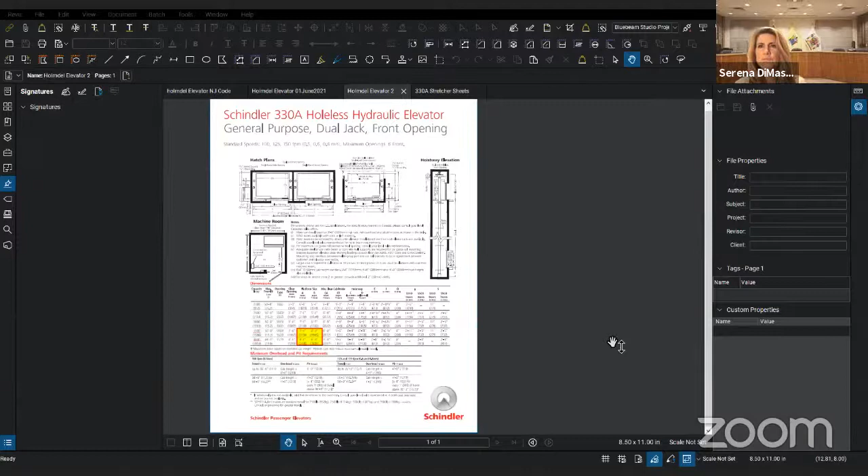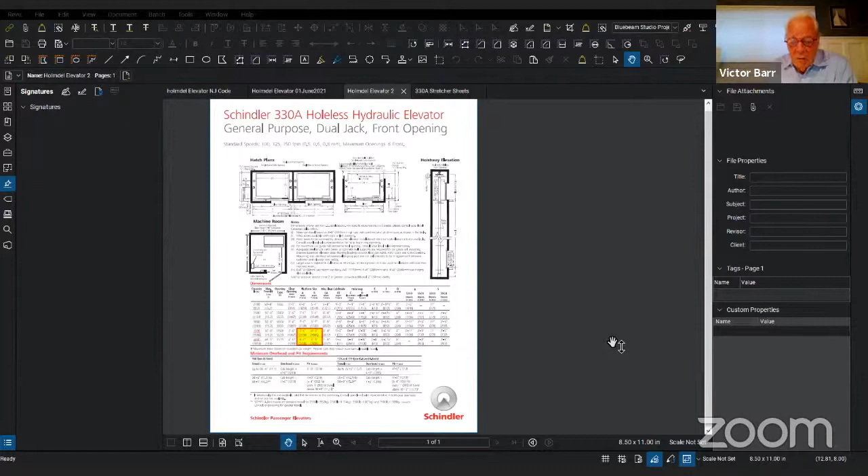The 2018 International Building Code, New Jersey edition, states that any building 4 stories or more must have at least one elevator that accommodates a 24 by 84 inch stretcher. Our original plan had what's called a 3,500-pound elevator with a platform size of 7 foot by 6'3". After hearing comments from the planning board asking if we could make this bigger for more breathing room, we decided to change to what's known as a 4,000-pound elevator.

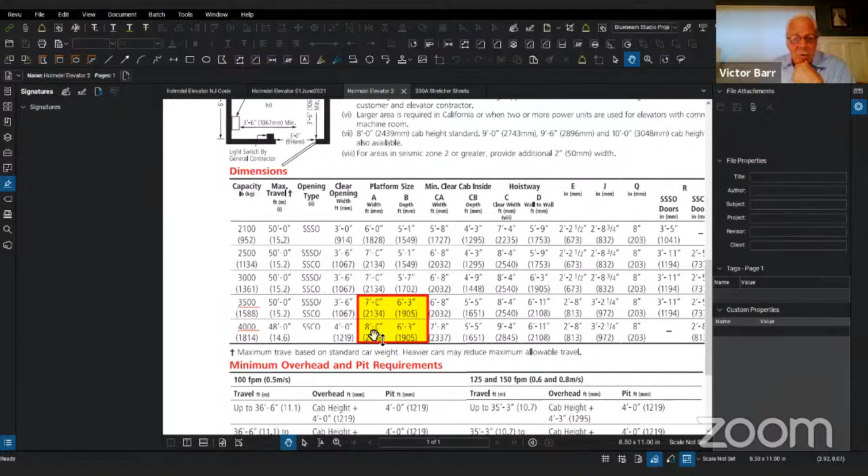This has a platform size of 8 foot by 6'3", which is 12 inches bigger than the original 3,500-pound elevator.

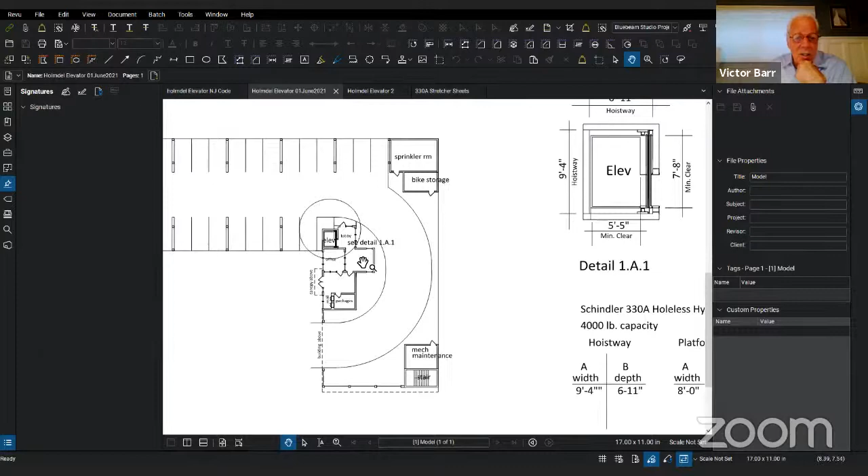On the plan, here on the first level is the new 4,000-pound elevator in the lobby area. And here it is on the upper floors, in the lobby area on floors 2, 3, and 4. That's the mechanical room that happens to be on the second floor.

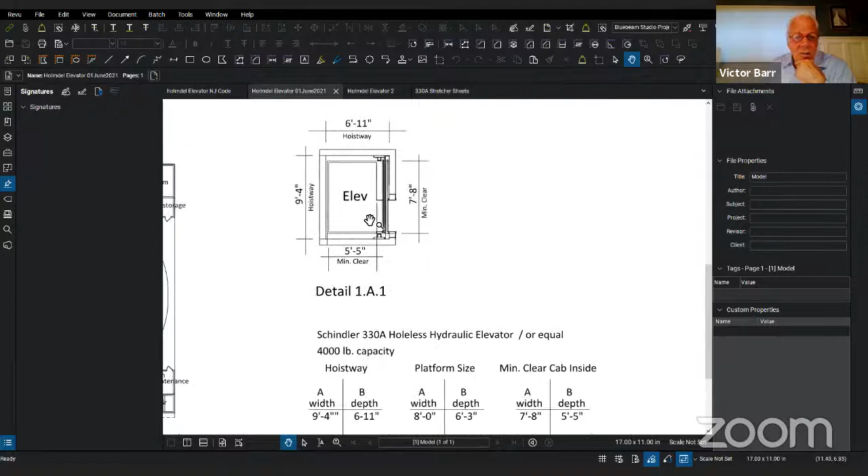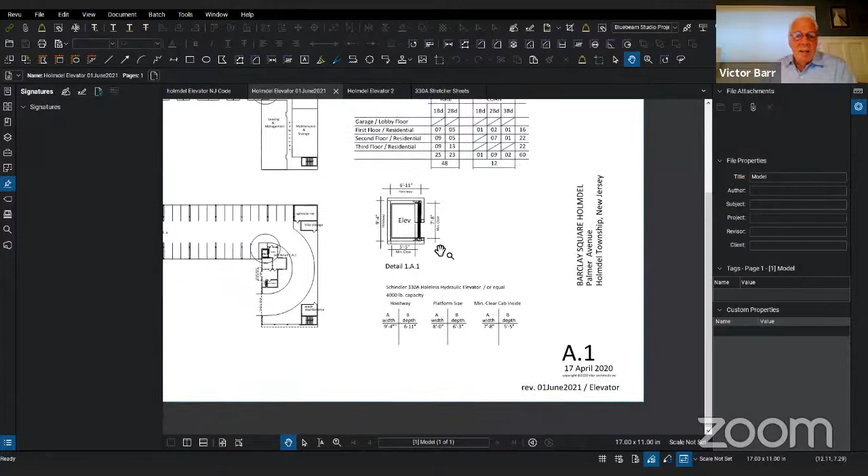From that previous plan, the hoistway is 9'4" by 6'11", which we have. The platform size, as I stated, is 8 foot by 6'3", and the minimum cab clearance is 7'8" by 5'5". So the 4,000-pound elevator meets the requirement of the 2018 International Code and fits in the allocated space within the building.

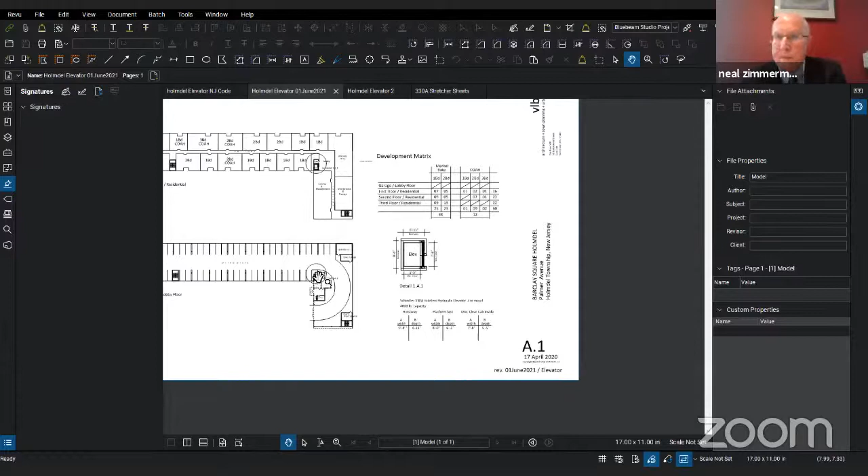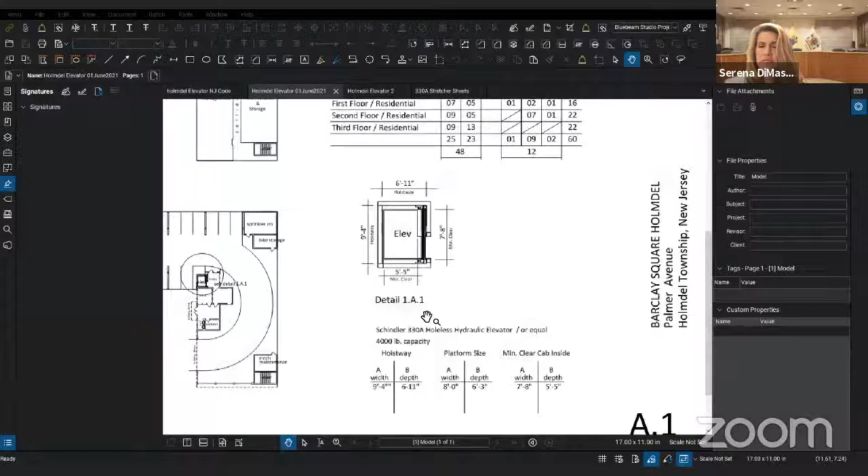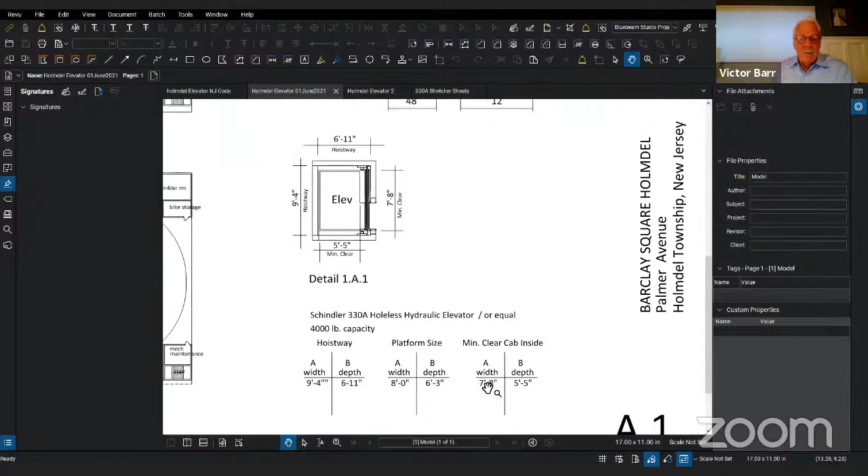Mr. Barr, when you say the cab itself is 96 inches by 75 inches - the platform, when you say platform, you mean the inside floor? Yes, the platform is the inside. But the minimum clear cab size is less than the platform size. In the 4,000-pound elevator, it's 5'5" by 7'8", which is shown here.

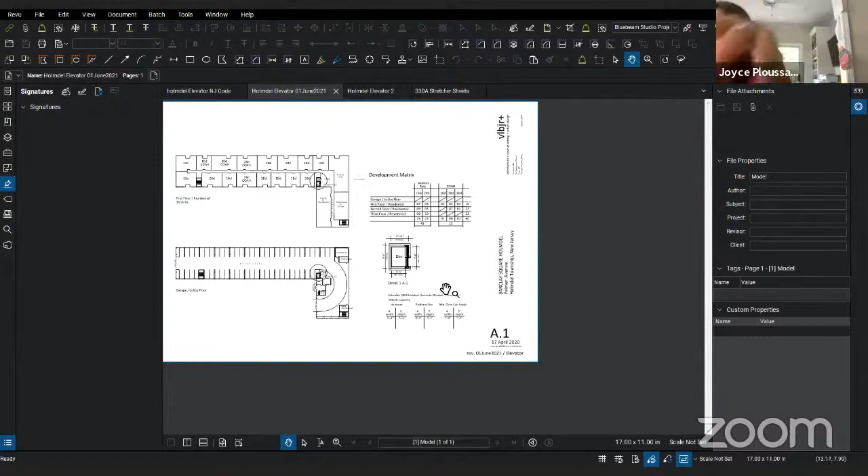So it's reduced. So then the size is reduced. Joyce, you're not muted if unless you're- Oh, I'm sorry. that's okay. I'm talking to myself while I know, I'm yeah, I know, me speaking. too. So.

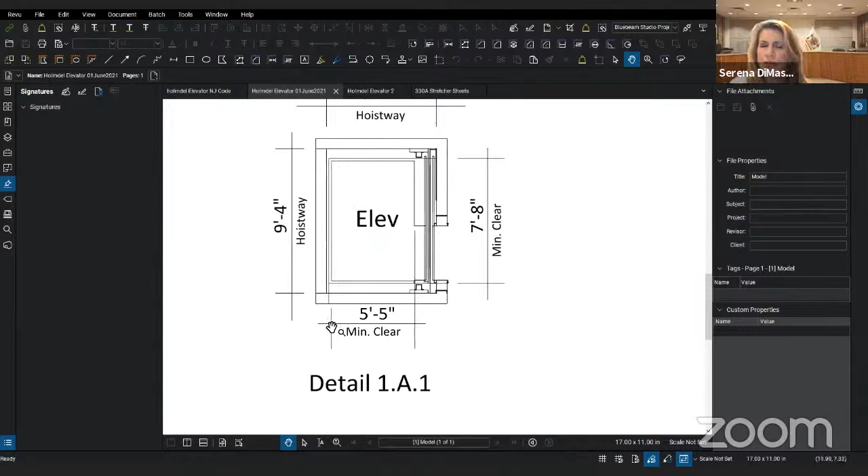So I'm trying to get what the interior is - that interior spot from wall to wall, where you're going to be standing, the floor space you're going to be standing on - is it 7 foot 8 inches by 5'5"?

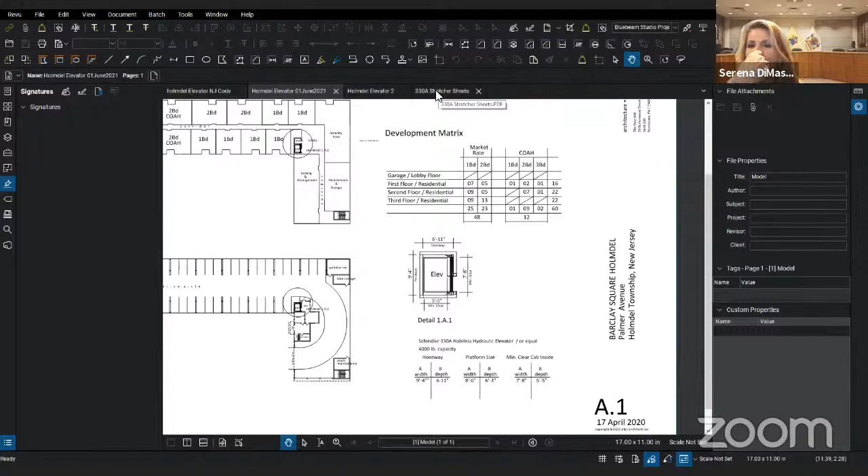All right, still doesn't fit, it's not 84 inches, but - this has not been presented as an exhibit, but this is the way: there's the 5'5", here's the 7'8", and this is how the stretcher works. It goes in and it goes on an angle, so there's additional space here, additional space here, and the stretcher ends up being right there.

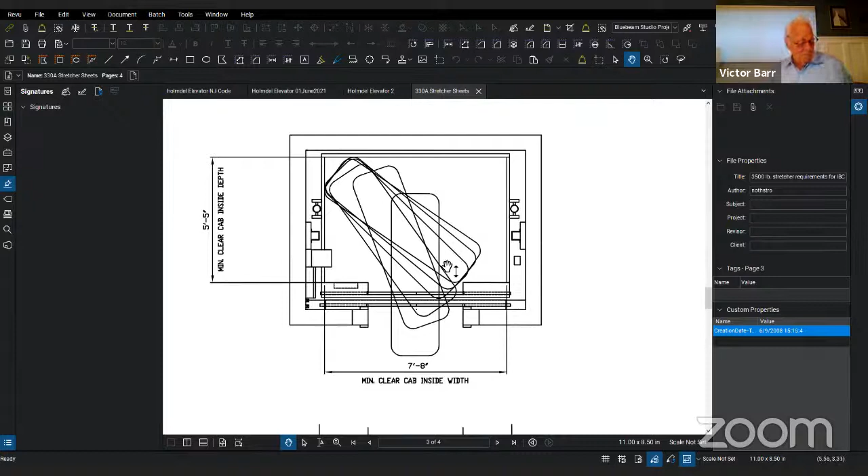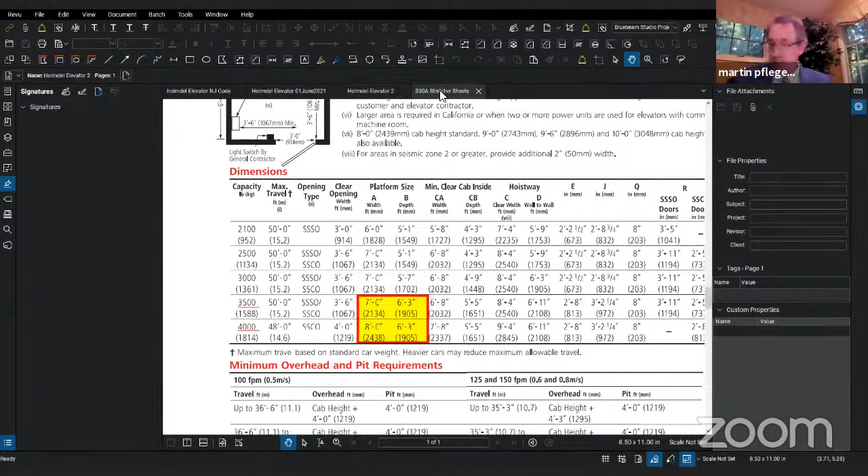okay. I know how a stretcher works. Thank you. So we Can just we, wanted- can we introduce as an exhibit? If that wasn't marked as an exhibit, we should use that. Yes, I mean, I don't know, Bonnie, do you know what number we're up to by any chance? Best off just to put A1 with today's date, Okay, which is 6/15/21.

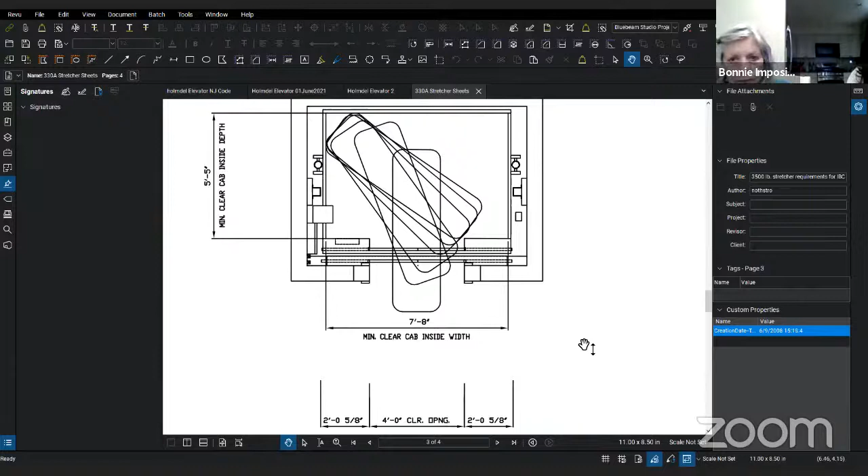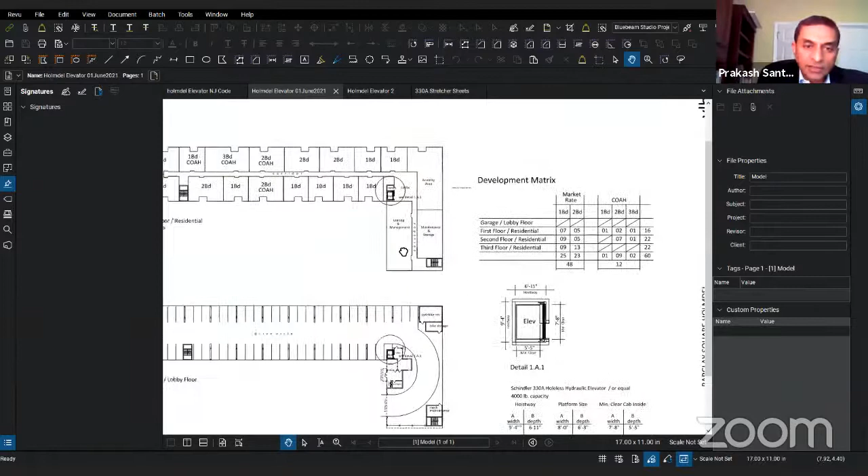Mr. Barr, if you could please put that up, that'd be great. If you could enlarge the screen, that'd be even better. Where do you want me to zero in on? Zero in on the elevator. If you could bring it to the center - not that, not the layout.

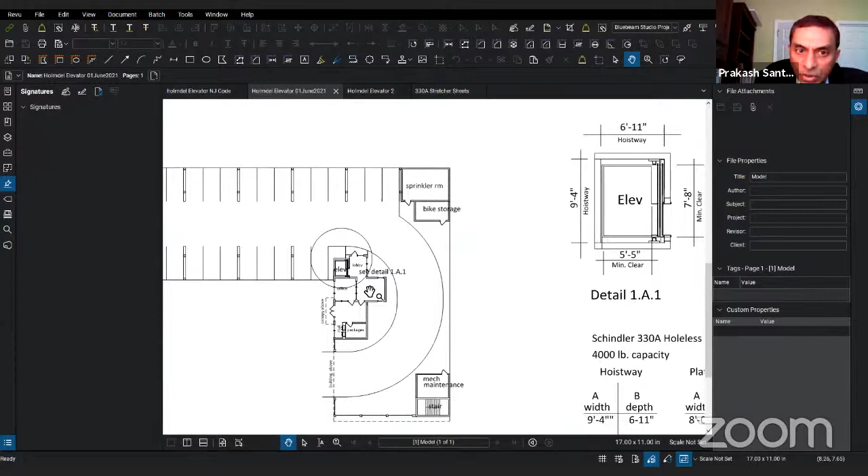Thank you for this, Mr. Barr, I have just a few questions. You have the circle around this elevator - what does that mean in relation to that parking spot within that circle? Is that usable or not usable? Well, the circle was just to define the detail 1A1, which is right here. The circle is nothing more than a pointer to look over here for a blow up of detail 1A1.

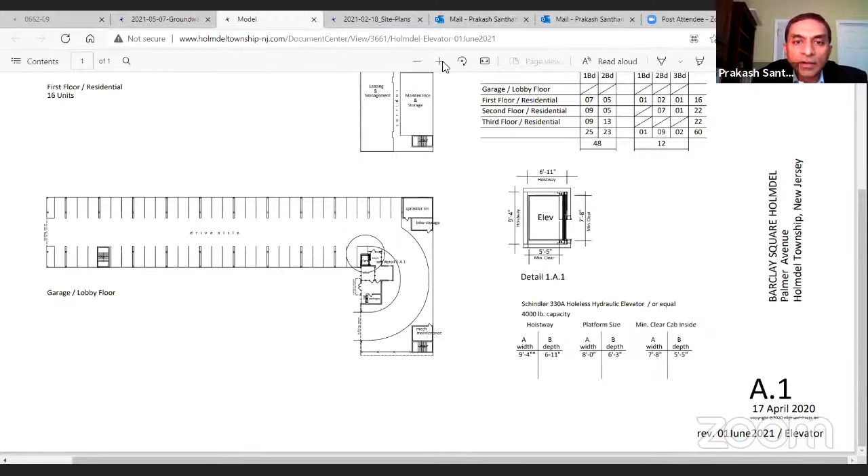Mr. Barr, first question, could you show us where the disabled parking spots are in this layout? They're probably shown on the site plan. Okay, so let me bring the site plan up.

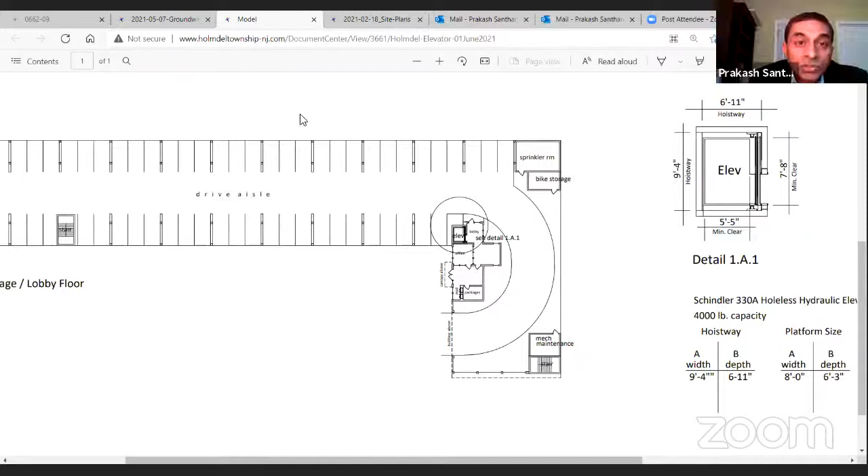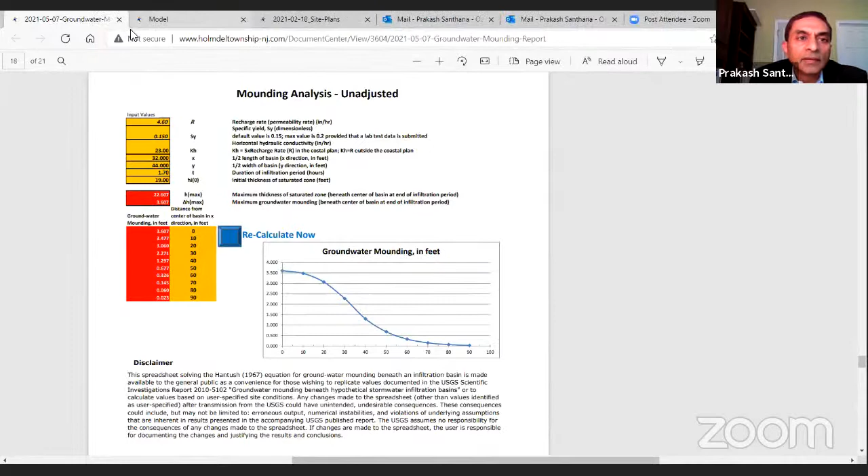Let's see, that's not it. Okay, so I have the site plan here. Can you see it? Yeah, there they are right there.

Okay, so if you look at the site plan, you can see there are 4 handicap parking spots, and each pair of handicap parking spots occupies 3 of the regular spots. You see that? It's the same width as 3 of the regular.

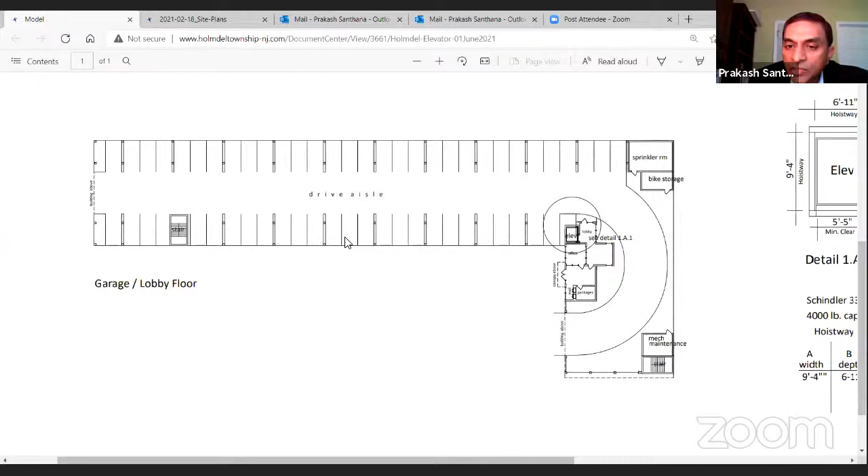Now, if I go to your new plan, I don't have a 3-spot here. So if I assume these 3 and these 3 are handicap parking spots, I get 51 spots as opposed to 53 in your regular site plan.

Madam Chairman, could I ask that any questions along these lines be directed to the civil engineer who's available to testify? Mr. Barr was here tonight to testify about the cab, and the engineer who prepared the site plan, which allows for the ambulance, would be the better person to answer these questions.

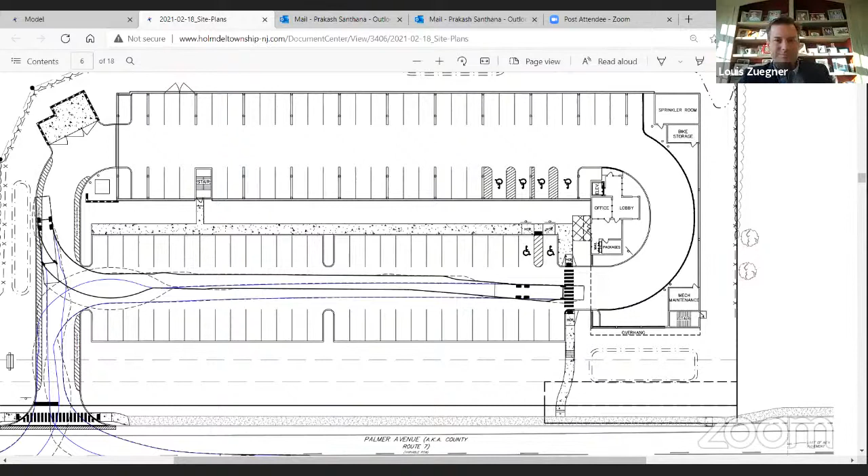Thank you, Madam Chair. I was observing but not able to speak. Okay, Lou, before you testify, could I just ask the committeeman what is the date of the plan he has up on the screen? Want to make sure we have the latest version. So the plan that I first showed has June 1st, you can see the date, June 1st, 2021.

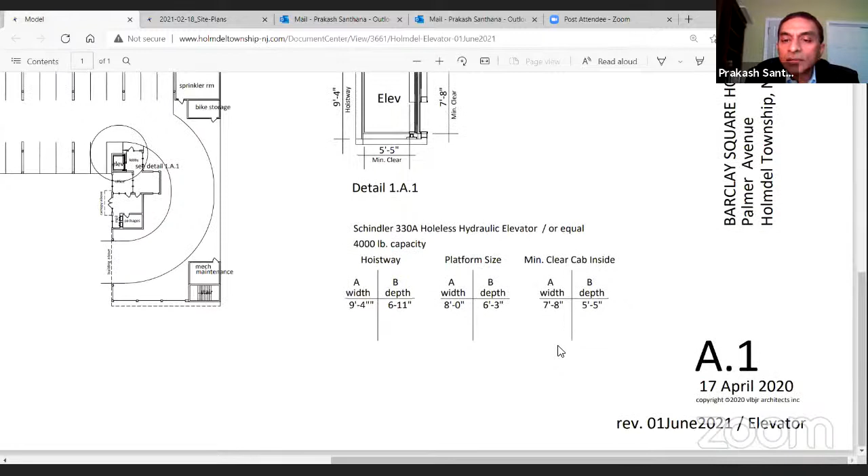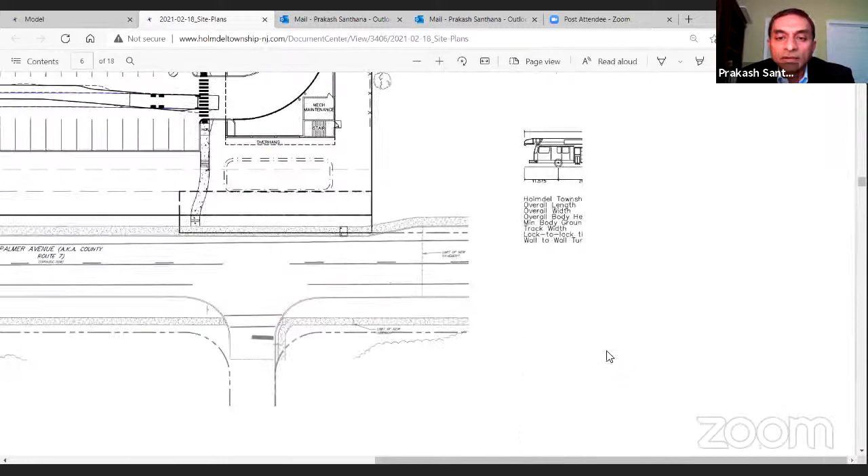Yeah, I'm talking about the site plan. Okay, the site plan, let's see. I don't know if you can read any date on this, but I'll expand it further. This is from, I think, February, if I remember right. It's the February site plan.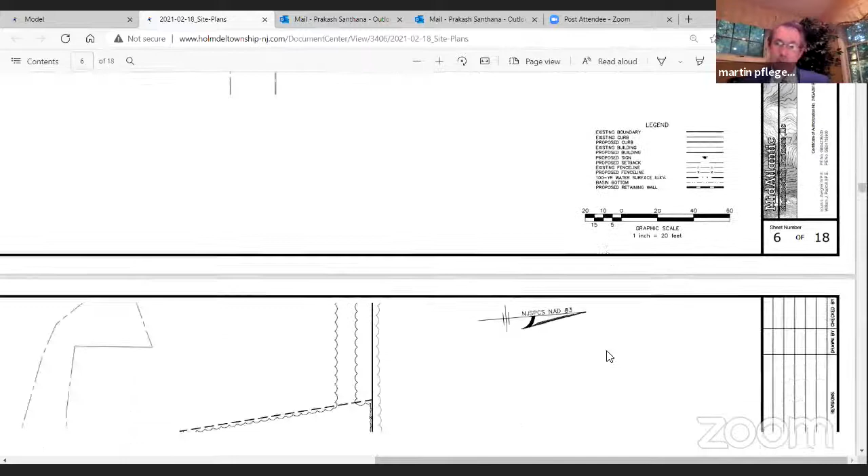Well, maybe Mr. Zuegner will be able to tell just by looking at the plan. There it is, there were revised plans. That's 2/18/21. 11/4/2020. Or yeah, that's when they signed them, but 11/4/2020.

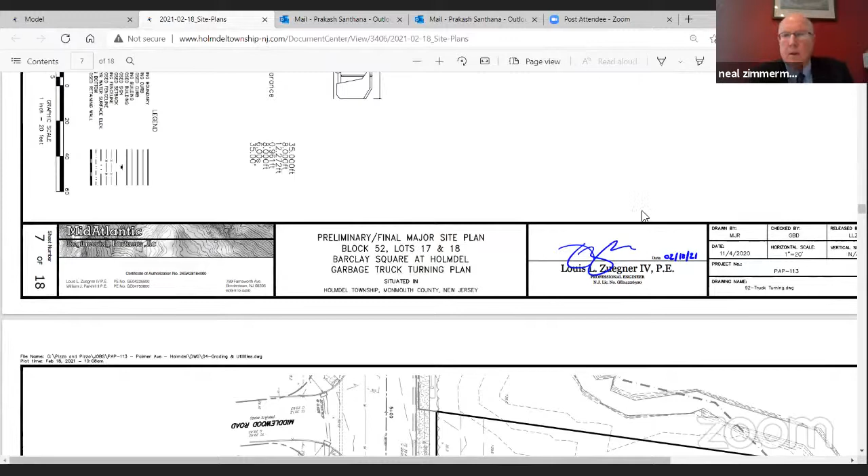Madam Chairman, could I ask that maybe Mr. Zuegner could bring up the latest plans? Because there was something that was revised to address that issue in a later plan. Thank you, Carrie. Okay, Mr. Zuegner, you're going to be.

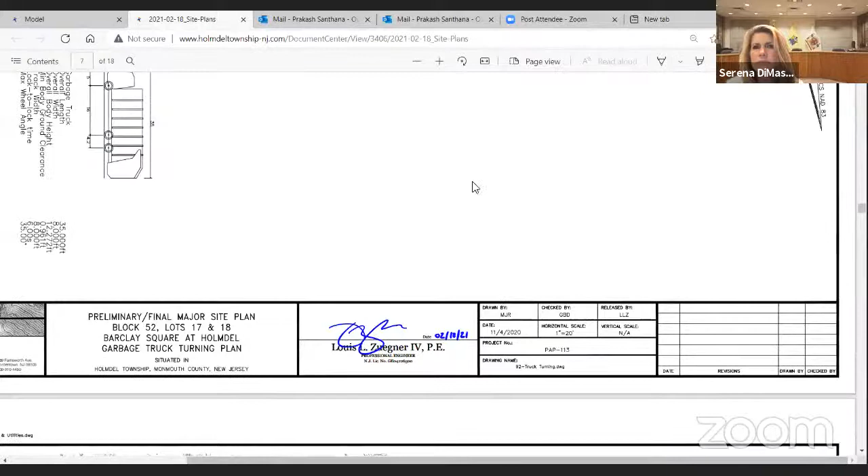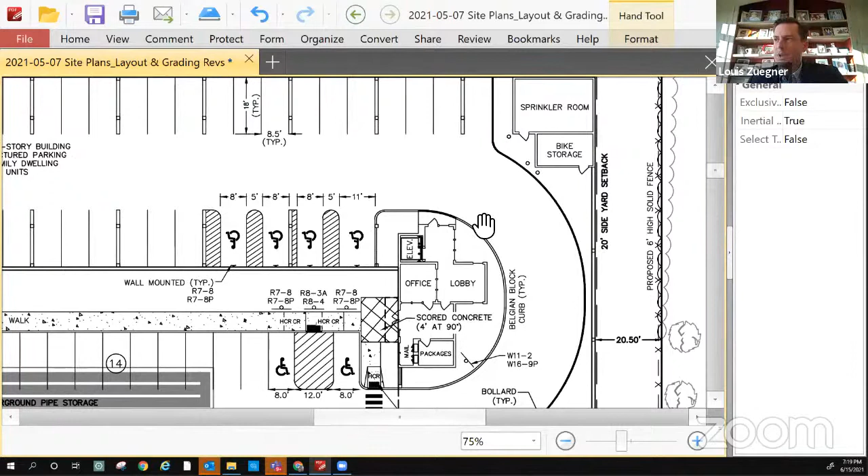So when we were looking at the dates, November was the original plan date when this was first submitted, and there were a series of revisions. This most current plan set is now 5/7/21. And what I believe the councilman was looking at in this area here, the architect's latest plans, I know he was submitting showing structurally how he was creating space for the elevator.

His plans, and he could talk to this as well, are not final construction documents at this point, but what he and I had spoken about and seen in this layout with this column alignment and these handicap spaces, there's plenty of room in here to modify this lobby and accommodate the larger elevator. So the space is certainly there.

If there's an inconsistency in what he's showing in the garage, that's because he's not intending to show the garage, that's our plan. So Mr. Zuegner, what you're showing us now is the same thing minus, so what Mr. Barr showed us is just this half moon kind of thing, and he just filled in some lines to the left. Would that be a correct statement? Where this makes the elevator space larger, and you can see there's space to make that larger. Right, okay, not infringing on the parking.

Yeah, if you don't mind, Chairwoman, that's an important point I want to clarify. In the plan that Mr. Barr showed, if you look into the top here where there are parking spots, they had actually shown a redesign of this entire parking area. I want to make sure that is not the final plan, and this one that Mr. Zuegner is showing is the final plan, because there are two problems with that.

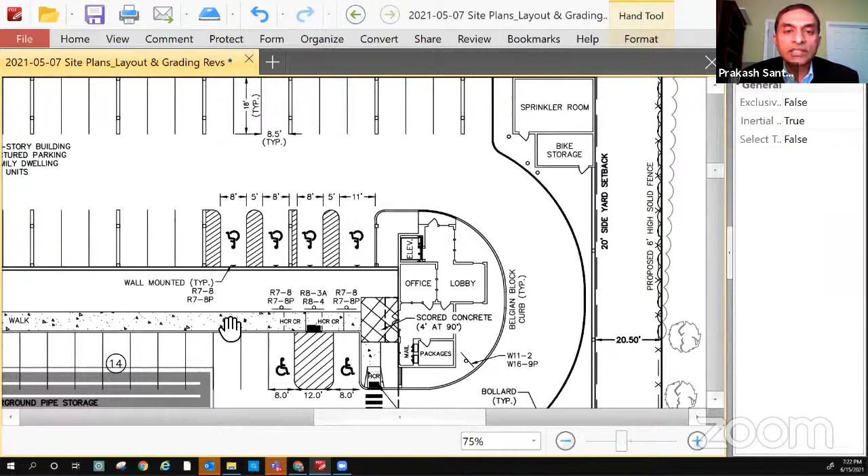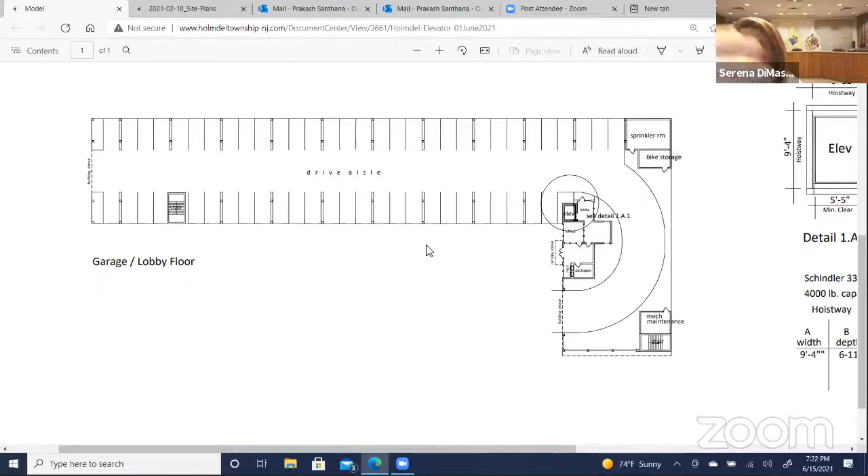Again, because I know you're new to the whole program here—what Mr. Barr was showing was, ignore the traffic, the parking spaces, that's just for show, that's not the plan. Only part of his plan, and Mr. Zuegner, correct me if I'm wrong, is where the elevator is. That's the only part he's showing you. The rest of it doesn't count, it's only for the elevator and what's in the elevator. For the parking, it would be what Mr. Zuegner just showed you. Is that correct, Mr. Zuegner? That's correct, our plan is representing the parking.

There's space to enlarge that elevator. Mr. Barr will design the building, and he's created the footprint of the building, which at this first level is just this lobby area dropping down. There is space for all 4 handicap spaces and the correct number of parking spaces. Okay, great, thank you, because that's confusing. If you have a revised version of the diagram, as I said, I'd like to read everything and compare. And if there's no information on it, then obviously it's a little misleading. That's all, thank you, I appreciate it.

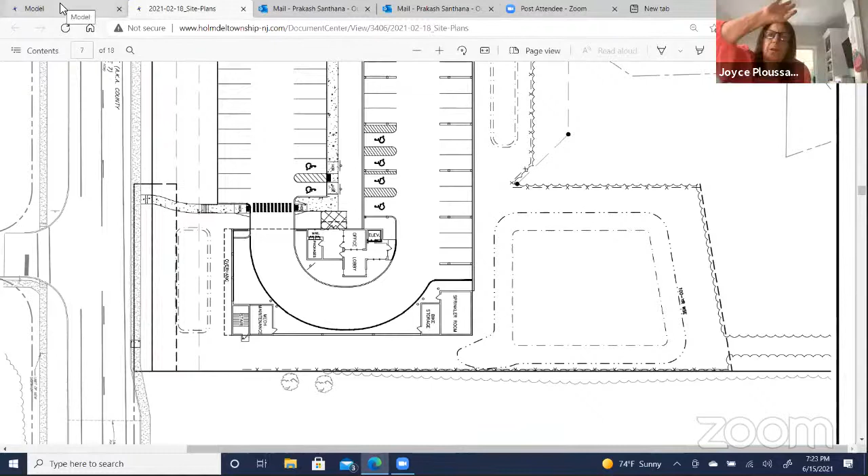I guess this is for Mr. Barr. Mr. Barr, when it's a medical emergency, time is always of the essence. And the new interior space and the new dimensions of the platform, will it now accommodate comfortably the stretcher, how many EMTs and the equipment they need? Will it be awkward, and will they lose time trying to position? That's all I want to know.

Well, I don't know how many EMTs it will accommodate and what kind of equipment it will accommodate. What I do know is that the original elevator we specified, which was the 3,500-pound elevator, met the requirement of the 2018 IBC code, which would accommodate the 24 by 84 inch stretcher. This elevator with the 4,000-pound elevator is larger than that elevator, so it'll accommodate obviously more than what the original elevator would accommodate. Now, like I said, I don't know how many EMTs and what kind of emergency equipment it can accommodate, but I do know that it's beyond the requirement of accommodating a 24 by 84 inch stretcher.